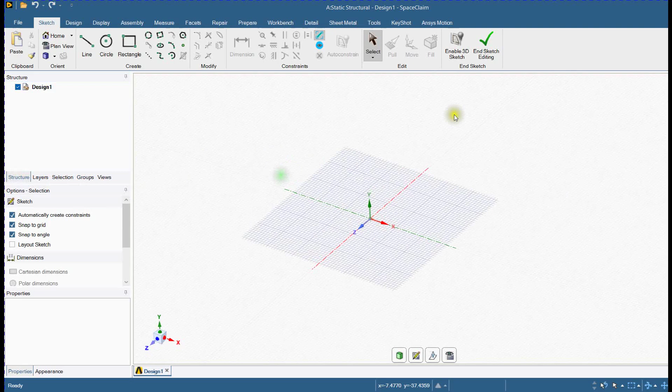Open SpaceClaim Design Modeler. You can see the progress here. End current sketch. Create a new sketch on XY plane.

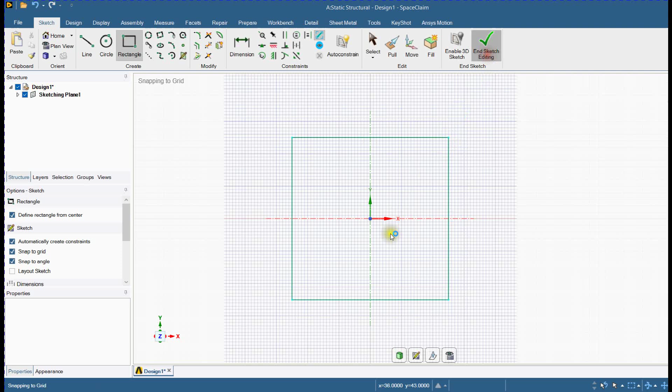Select rectangle. Define rectangle from center. Provide dimensions and press enter. Close active sketch. Select surface and pull. Set initial beam length.

Convert this dimension as a parameter. You can see here that parameter is added. You can rename and check its properties here.

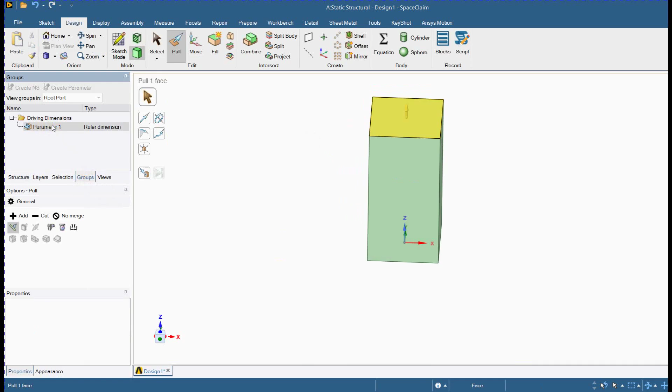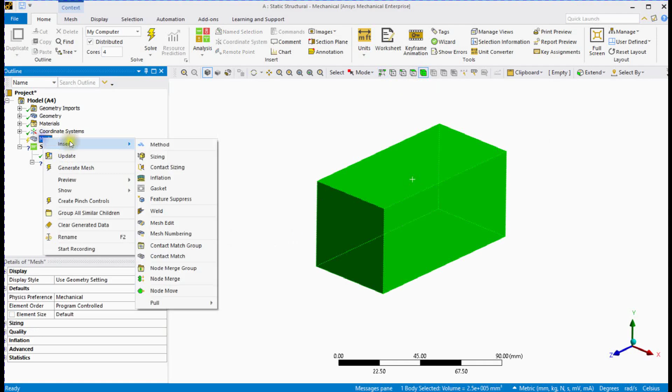Now double-click on this cell to open mechanical window. You can see the progress. Define mesh parameters. Select body and define element size. Generate mesh.

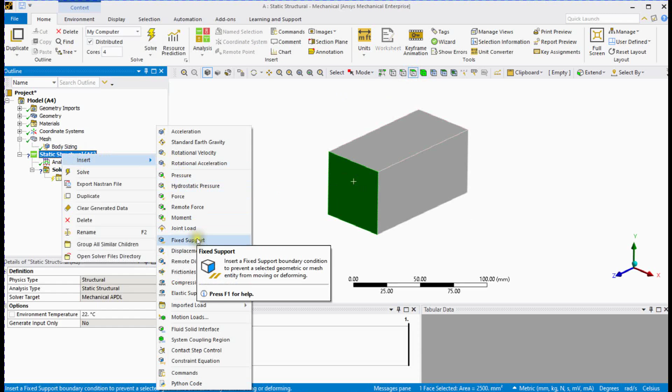Select face and define fixed support. Define gravity in negative y direction. Problem setup is ready. Next step is to set a deformation parameter.

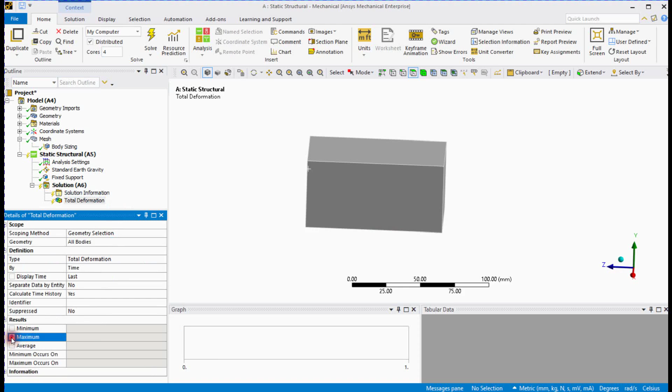Cantilever length is input parameter and deformation is output parameter. You can see both parameters here. Now add different lengths. You can mark this cell if you want to store its solution results.

Select all rows and update all rows to get the deformation results. You can see the updates. We got first result set. Second.

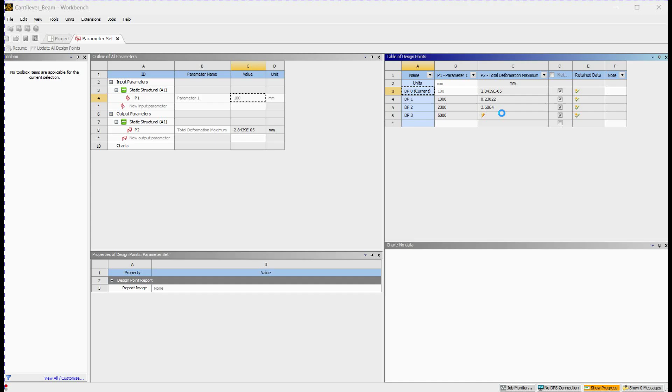Third. Fourth result set. Select this row and make it active. You can see the updated values based on active design point 2.

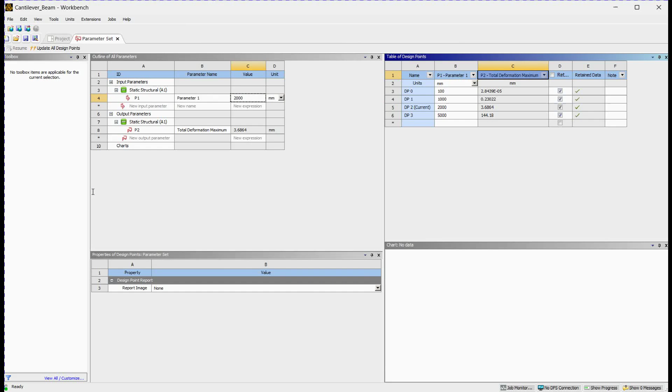You can save this table in the form of CSV by these steps. Let's check the CSV file. You can use this table to make charts and further investigations.

Now let's check nodal results. Save project. Click on total deformation result. Zero deformation at fixed boundary conditions.

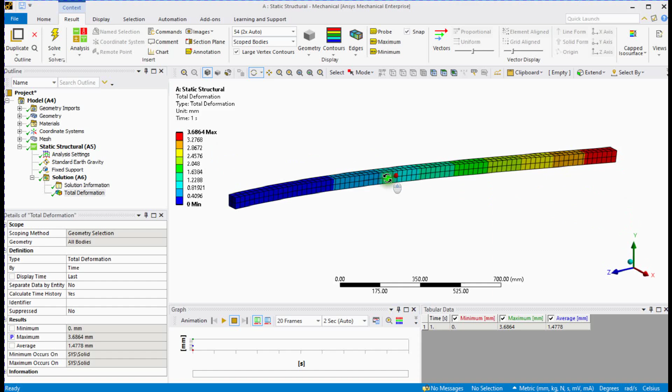You can set enlarged deformation view by scaling factor. Let's check stress.